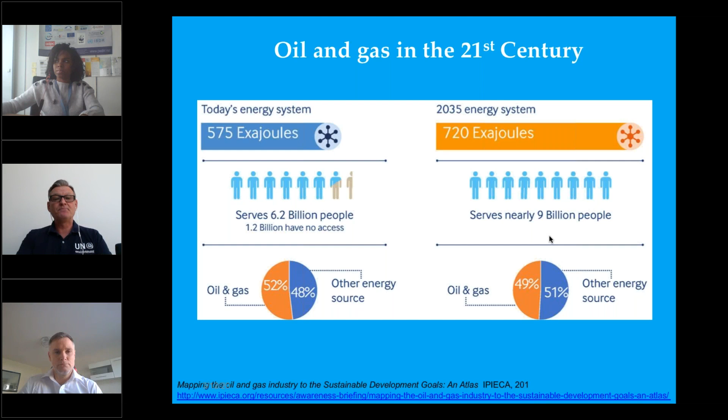Throughout the life expectancy of the oil and gas sector, chemicals are used, let's say, from cradle to grave. We're focusing on the exploration and production side of things, and within this particular module, chemicals are used throughout, whether it's at the time of exploration drilling, logging and testing, well completion, field management, workover and stimulation. Bottom line is, whatever link in the chain of the oil and gas sector, hand in glove with that is the use of a very large and complex number of chemicals.

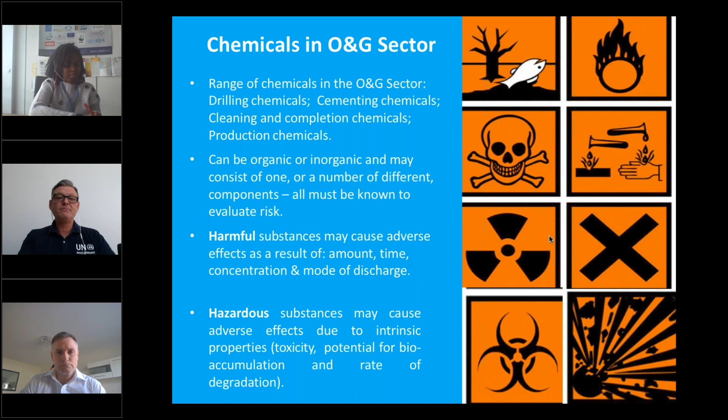Moving on, one of the biggest aspects in oil and gas as it pertains to both chemicals and waste management is the drilling fluids which are used. Drilling fluids are a major component of the sector and present major environmental and public health concerns. There are primarily two categories: the more simple water-based drilling fluids, WBDF, and then the more complicated, potentially more hazardous oil-based drilling fluids, OBDF.

As the name suggests, the water-based fluid's base material is water, and the oil-based fluid's base material is oil. You could think about the difference similar to a water-based or an oil-based paint—the same phenomenon applies to these drilling fluids. In more recent times, a third category has been developed: synthetic-based drilling fluids, where the oil has been largely replaced by more modern synthetic chemicals.

As I mentioned, water-based drilling fluids are by far the simplest, the most environmentally benign, and also the cheapest. So given the choice, oil engineers would, as a first port of call, use water-based drilling fluids simply because they're cheaper. However, they have limitations—they're not good for use in deep, complex drill sites which are horizontal, or where we have particularly complicated geology. That's where oil-based, or more latterly synthetic, drilling fluids come into play.

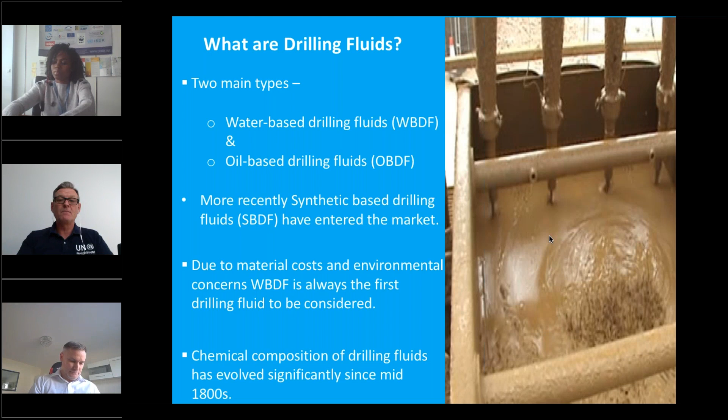Each of those chemicals comes with their own environmental and public health risks, and we as environmental practitioners need to be familiar with the components and familiar with how best to manage them. Bottom line is, drilling chemicals, drilling fluids are a cocktail of different chemicals.

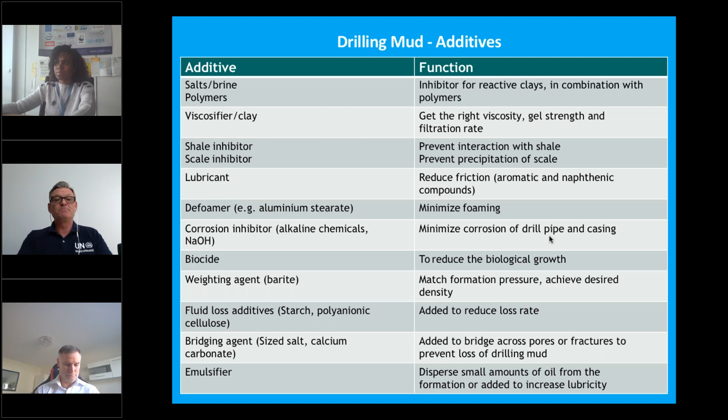It's not a hazardous, toxic impact—it's more harmful in that it's a physical covering of the seabed, but in a relatively short period of time, that seabed is going to recover. That said, we don't encourage the discharge of water-based drilling fluids in a terrestrial, shore-based environment, because they can have elevated pH and elevated salinity, which aren't necessarily an issue in the marine environment, but in the terrestrial environment they'll probably need to be contained and treated before disposal.

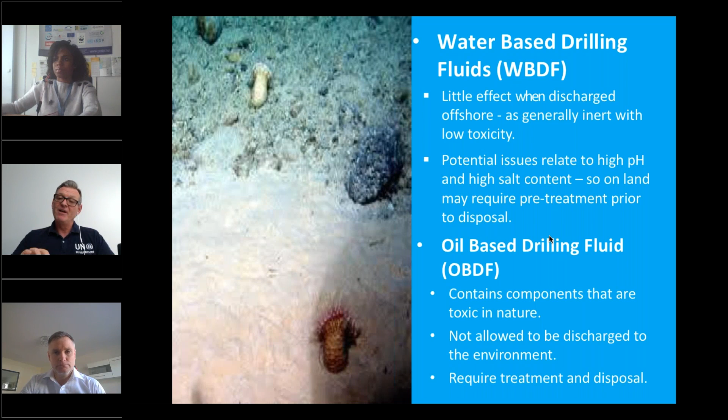Dealing with the more complicated, deeper wells and more complex geologies, we use oil-based muds. These muds are a cocktail of chemicals, many of which are toxic or hazardous. They are not allowed to be discharged within the marine environment, nor the terrestrial environment. They need to be contained, managed, treated, and finally disposed of. Due to economics, all drilling fluids will be reused and recycled to the extent possible, but there comes a point after which they have to be disposed of. That's where some of our greatest challenges are encountered.

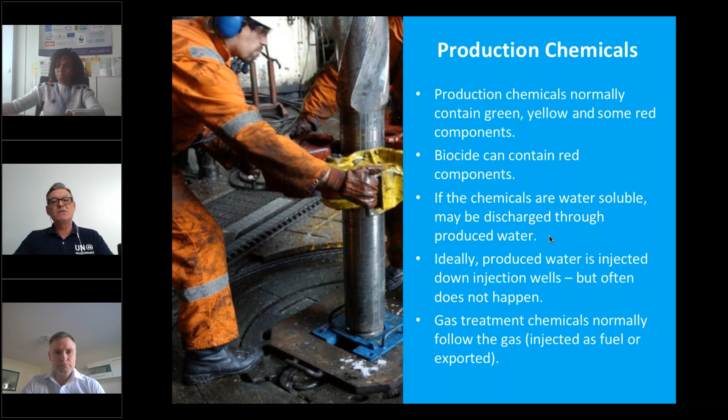As mentioned previously, we have a host of chemicals used as production chemicals. As you can see in the slide, some of the chemicals are what we call green, yellow, or sometimes red. That's a form of simple categorization which denotes the level of hazard. Simplistically, green listed chemicals are relatively benign, yellow is medium, and red chemicals are of the greatest environmental and public health concern.

We talked earlier about biocides. These are an example of a component which may contain red chemicals - a red flag. We need to be aware, we need to be concerned, and we need to monitor and manage it very carefully.

So the chemicals within the drilling sector will typically be discharged within the host environment. Many of them will be contained within the produced water. What is produced water? When we strike an oil reservoir, it will often be in conjunction with a lot of water. That water also gets liberated through the drilling process, and that's often referred to as produced water. The produced water may contain a lot of chemicals, may contain a lot of hydrocarbons. They need to be managed.

In more sophisticated operations, the produced water can and should be reintroduced back into the underlying geology. Often this isn't done because it's a complicated process, and therein we end up with a disposal, a chemical problem. Again, produced water is a large chemical holding body, a large waste management consideration that we will have to encounter.

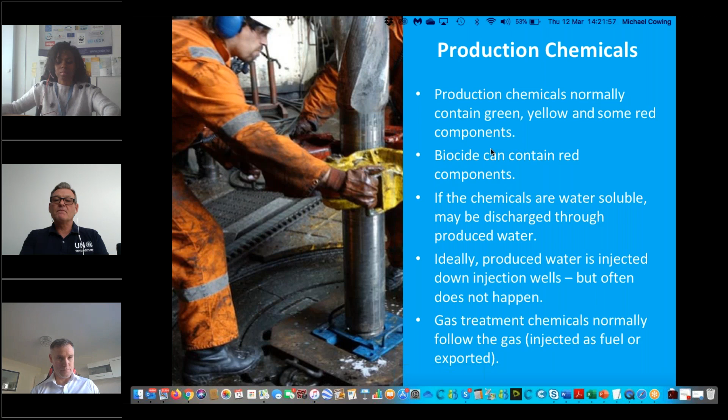You may have heard of it, don't worry if you haven't - in time you'll become familiar with it. Basically, as the name suggests, it's trying to harmonize internationally the language we use, the names we use, the packaging we use when we're handling chemicals, to try and reduce miscommunication. Miscommunication will often lead to accidents and incidents. So we're trying to simplify and harmonize the language we use around managing, transporting, and using chemicals.

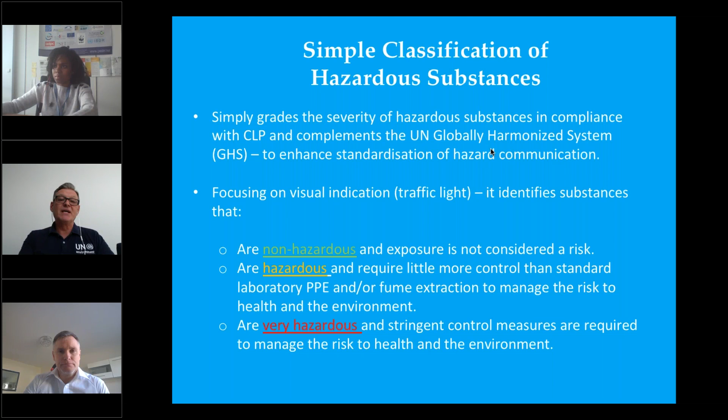I move on now to the Material Safety Data Sheet, the acronym for which is MSDS. Every chemical used, transported, and ultimately disposed of must be accompanied by the MSDS. I would say as an environmental practitioner, this is possibly the most important tool you have in your toolbox for managing chemicals. The MSDS is in compliance with international conventions - it's not optional, it's a must. The manufacturer must send chemicals with the MSDS.

The user, in this case the oil companies and subcontractors, must have the MSDS to hand. It must be available, it must be displayed, so that those individuals working with the chemicals are familiar with the risks they're being exposed to, familiar with things such as the health and safety requirements, and familiar with what personal protective equipment needs to be used. The MSDS will also, in detail, tell us how ultimately these chemicals need to be disposed of.

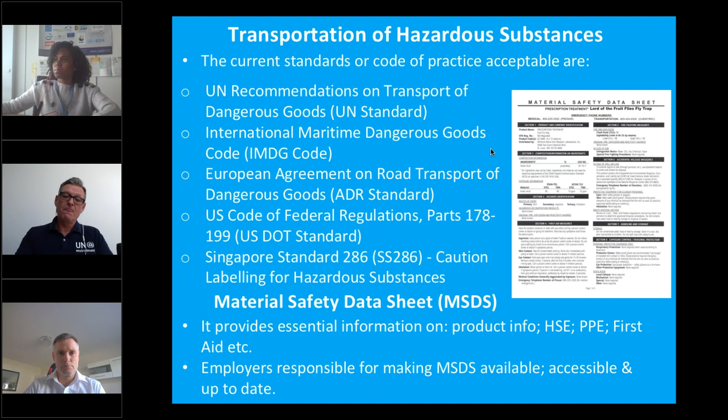To manage the risks, we need to understand the composition of all of these chemicals. We can't know one component and not the other. We have to understand in entirety what the components are and what the risks are. If uncontrolled, chemicals can pose serious risk to both public health and the environment.

To help you in the management of chemicals, there are multiple interlocking, interrelated national and international legislative tools, be them national laws, international treaties, international agreements. There's a host of them in place. We need to be familiar with them and how to apply them.

Most importantly, as I've mentioned, is the MSDS, the Material Safety Data Sheet. This will be drawn up and must be in compliance with all of these international laws and treaties. So as a starting point, the MSDS is your best friend, it's your best tool, it's the thing that's going to help you best manage chemicals in your oil and gas sector.

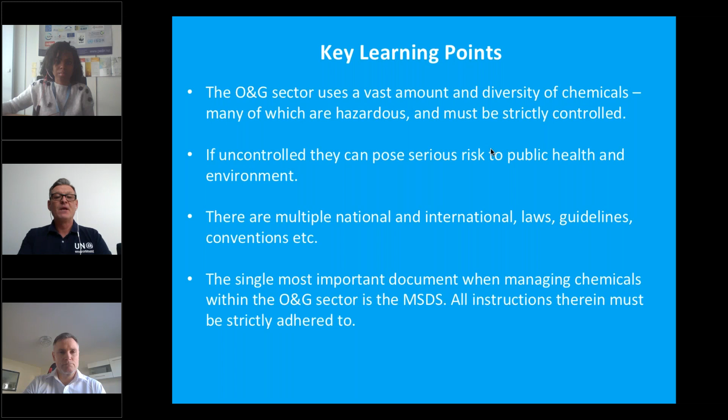The second part of the presentation relates specifically to waste management within the sector, and there's a lot of overlap between use and management of chemicals and management of waste, because many of the chemicals used ultimately end up as a waste product.

What will we talk about in this section? We'll talk about what is waste, why wastes are a concern to us. We'll look at the definition of waste, which is very important in a legal context. When is something a waste, when is it not? We'll look at some of the international frameworks, in particular the European Waste Framework Directive.

In a European context, a very important piece of legislation. What are some of the specific wastes in the oil and gas sector? Waste management planning, which is a key component, and we'll remind ourselves at the end of some of the key learning points.

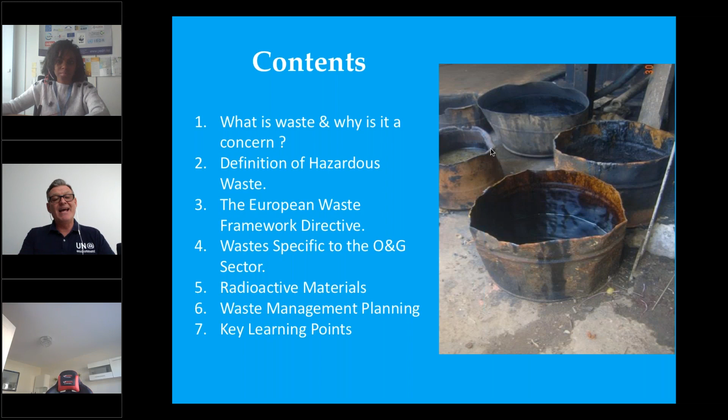So what is a waste? Waste definition: in the legal sense, a material becomes a waste when it is a substance or object which the holder discards, or intends to discard, or is required to discard legally. So it's gone beyond the point of its utility value, it's to be or has been discarded.

When we talk about hazardous waste, that falls under the same definition, but there's a sub-definition: hazardous wastes are those wastes which pose a substantial or serious threat to public health or the environment, hence the name hazardous. They can be hazardous because of their characteristics, which could be ignitability, reactivity, toxicity, or corrosivity. One or more of these characteristics make this waste product hazardous.

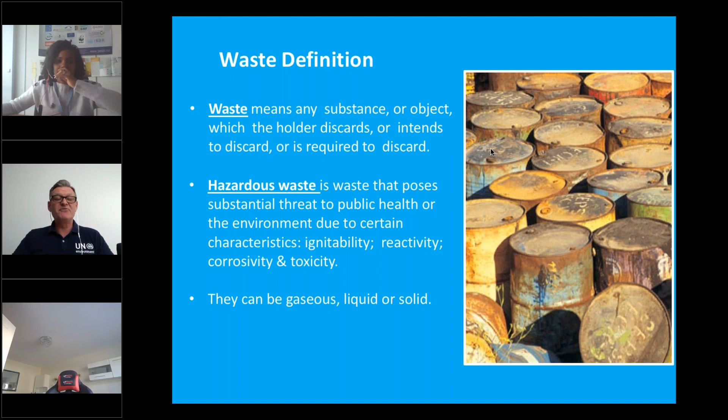And again, they can be in various forms. They can be gaseous, liquid, or indeed solid.

Sorry, Mike, to cut you short. We have like 10 minutes for you to do your presentation. Okay, jolly good. I've just been informed I have 10 minutes left, which is perfectly fine. I think we're on course.

The drilling fluids we've talked about a little bit. It could be oil-based, water-based, or synthetic, but it's the drilling fluid being pumped down the well, which will be reused to the extent possible, but ultimately becomes a major waste management problem for us. We then have produced water, oil and gas being liberated, but often in association with substantial volumes of water.

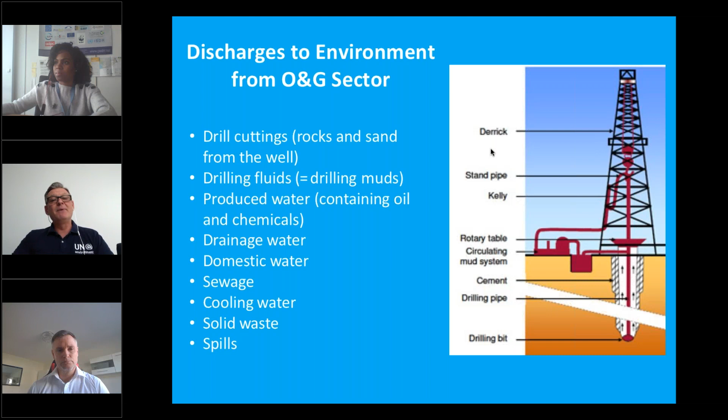In terms of the treatment of hazardous waste, it needs to be managed cradle to grave, that every link of its life cycle has to be managed with no inadvertent discharge to the environment. We have to recognize that the oil and gas sector is a very substantial waste generator globally.

In a lot of countries, international oil companies are working in developing countries. The reality, if we talk about Africa, Asia, to an extent the Caribbean, is that a lot of these developing countries lack substantial or sufficient waste management infrastructure. So they may not have engineered landfill sites, incinerators, or thermal desorption units. If oil companies are producing waste and the host country doesn't have the facilities, they have to be developed, engineered, be it long-term or imported on a mobile basis. Incinerators and thermal desorption units can be imported, or the waste itself has to be managed, packaged, and exported to a disposal facility.

Irrespective of whether the oil company is American or European, if operating in, say, Africa, the oil company does not lower its standards to those that pertain in that particular African country. The important thing is they should adhere to the same standards they're using in Europe and North America. In my experience, very often they will try not to, but as regulators, as environmental scientists, we have to ensure the oil companies are operating to the highest standard.

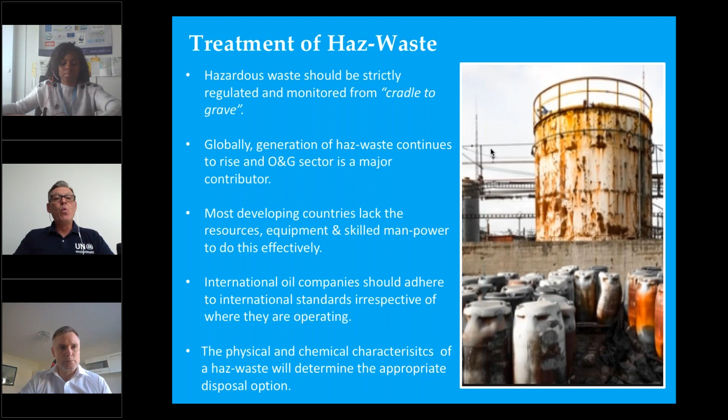The physical and chemical characteristics of the hazardous waste will determine which disposal option we use. In Europe, a very important piece of legislation is the European Waste Framework Directive, which sets in legislation many important components and considerations.

It enshrines the polluter pays principle, which means if you generate the waste, if you are the polluter, you have to pay. Extended producer responsibility means if you're the waste generator and you give it to a third-party transporter, for example, and he dumps the waste illegally, you as the generator still retain a responsibility. It's not out of sight, out of mind.

It also introduces the waste hierarchy, which I think we'll all be familiar with. This enshrines the fact that at the top of the hierarchy, the most desirable is that we prevent waste, minimize waste, reduce waste, recycle waste, and only at the bottom end, only the smallest remaining fragment of waste ultimately needs to be disposed of.

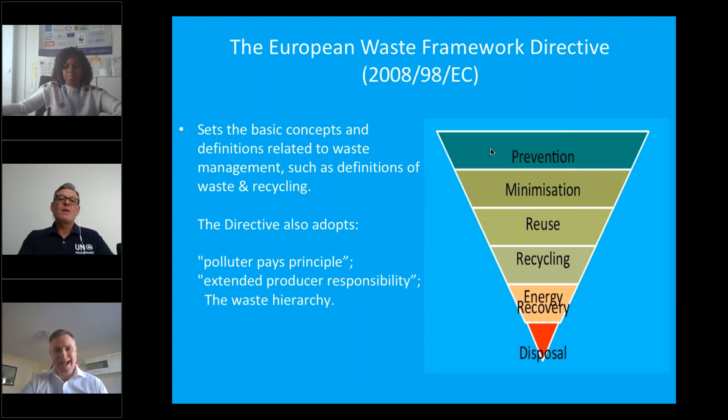In terms of the management of hazardous waste, when you have hazardous waste, you have to act appropriately. The hazardous waste cannot be mixed with inert waste. It cannot be diluted. It has to be properly contained and labeled, must go to a licensed hazardous waste disposal facility, and the environmental regulator, whichever country, has to be notified of that movement of hazardous waste.

So some rogue operators might want to dilute the hazardous waste, or mix it to get it to a chemical characteristic where it's no longer hazardous. Such approaches are prohibited in law and should be monitored and regulated by ourselves and not condoned, and corrective action needs to be taken.

The picture on this slide is taken in an African country, cradle to grave. I followed the process. The hazardous waste, which was meant to be going to an engineered landfill, ended up, as shown here, dumped on some agricultural land. Very sad, very common. That's where strict regulation and enforcement is essential.

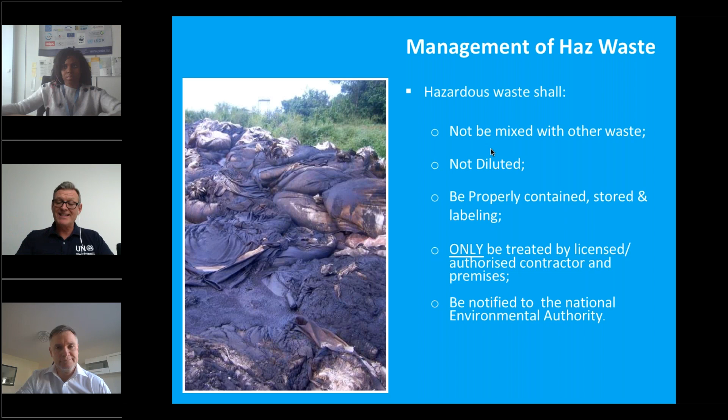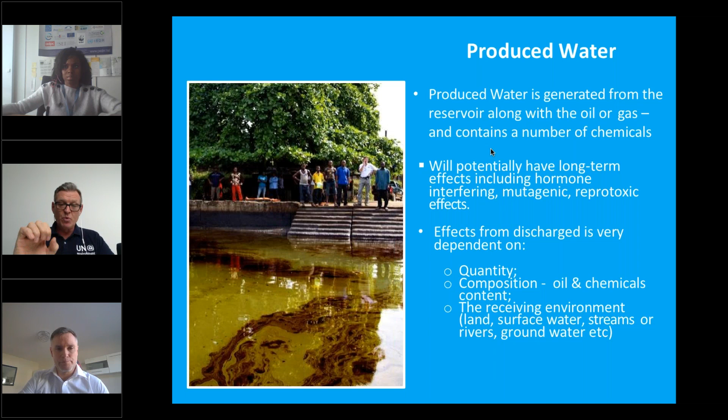We've talked about the impacts of water-based and oil-based drilling fluids. I don't need to labor that again. Produced water, if discharged inappropriately, as shown in this picture, is going to be liberating chemicals and hydrocarbons. Produced water, we have to get on top of it, and I'll explain how we can do that. And then we have very many emissions to air.

One of the biggest culprits of that is flaring and venting. We're saying in this day and age, flaring and venting needs to be a thing of the past. It needs not to be encouraged other than under perhaps emergency situations.

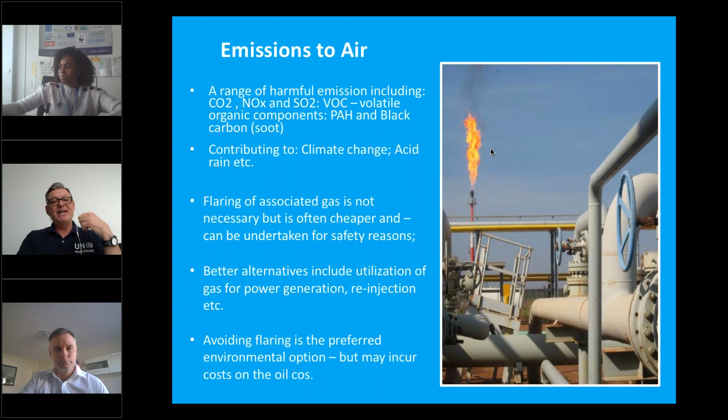How do we manage all of these different solid, liquid, and gaseous wastes? This should be encompassed in the waste management plan. When applying for a license, when the EIA is being done, the oil operator has to produce a waste management plan. With chemicals, we've got the material safety data sheet. With waste, we've got the waste management plan. It is the Bible, it is crucial. The operator must anticipate how much waste is going to be produced, of what characteristic, where and when.

Some of the graphs to the right show what I've extracted from a waste management plan. They're anticipating what they're going to generate, when they're going to generate it, and in what volumes. So the plan must identify the waste, and must also identify how it is going to be disposed of. If there are existing facilities to be used, all well and good. If there's not, what are they going to do? Are they going to build a landfill site, for example? Are they going to import thermal desorption or incineration? Are they going to stockpile, package, export overseas?

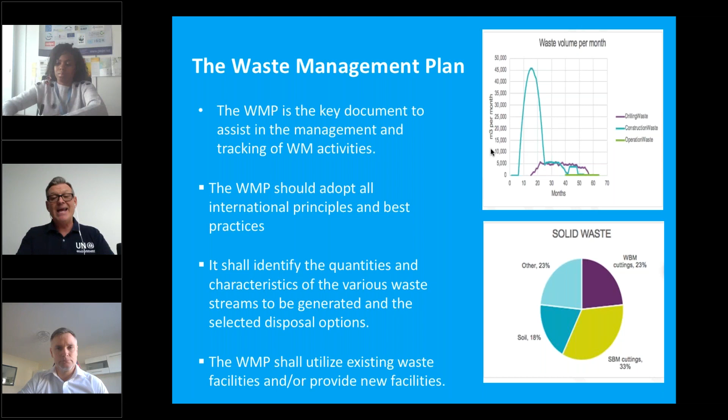When you're evaluating the waste management performance of a company, the waste management plan is your Bible, your go-to document. There are many options for waste management - I've mentioned some of them in passing, and Ian's going to get into detail on them.

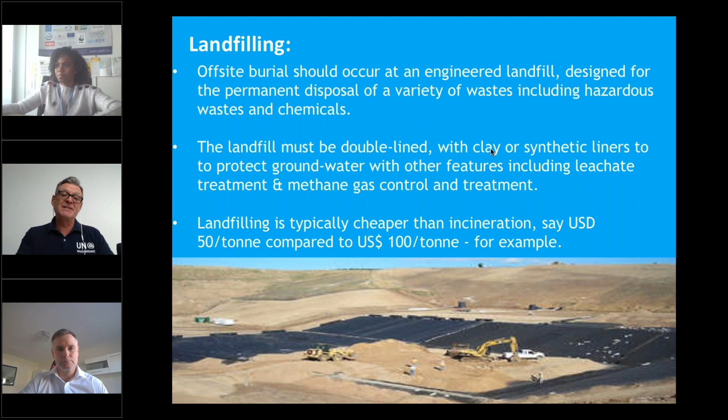We have landfilling, which is an engineered site with low permeability membranes. It's really a containment solution, relatively middle order cost, perhaps $50 per ton. Thermal technologies are more expensive, perhaps double the cost, but there is a role for thermal technology.

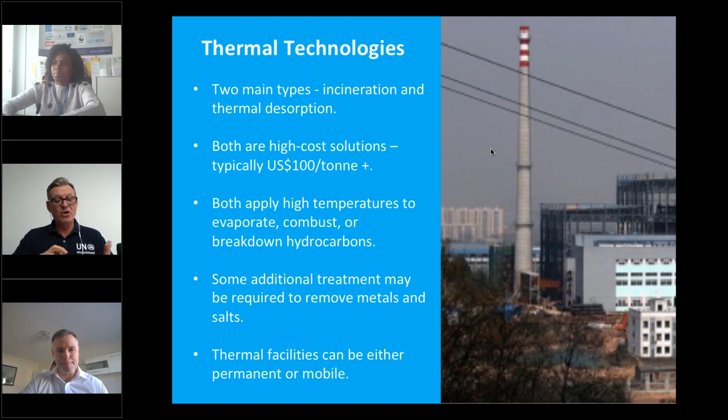Some waste products, some hydrocarbon products won't lend themselves to bioremediation, won't lend themselves to landfilling. They'll need to be disposed of thermally, either by incineration or thermal desorption. Ian will talk more about these in the coming presentation.

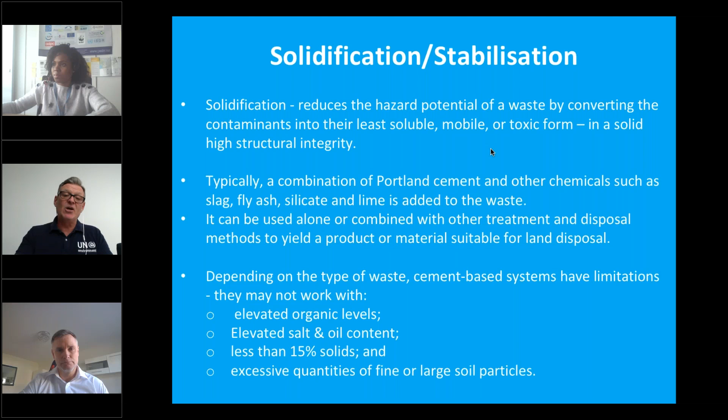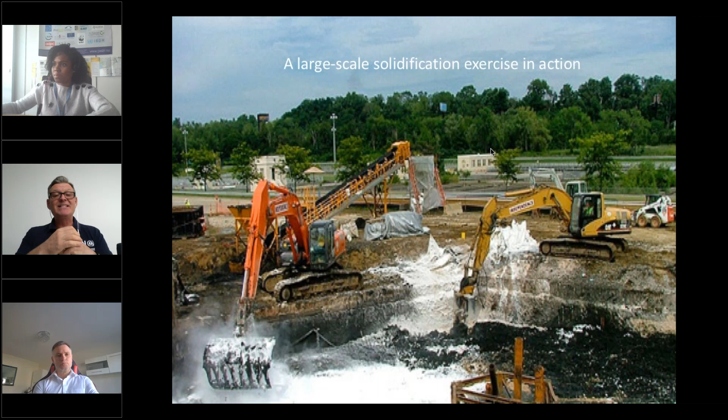There's solidification, where you try and stabilize the product, typically using cement, fly ash, silicate. It does have an application, but doesn't work in all situations. If you have less than 15% solids, if you have very elevated organic levels, it's probably not going to be the technology to use. Here's an example of contaminants, hydrocarbons, being cemented in place to reduce their migration and leaching. So basically, there's a range of waste products and a range of solutions, all of which need to be evaluated, identified, and selected in the waste management plan.

Very quickly then, to summarize with my final slide, some of the key learning points: we have to recognize the oil and gas sector is a major waste generator. Waste management is hand in glove with oil production, gas production. Much of this waste is hazardous and will need strict control, regulation, and enforcement. Some of the biggest waste products you're going to deal with will be the cuttings, the waste mud, and the produced water - very large in volume.

It needs strategic planning in advance, not at the time of when it's being produced. Oil companies must comply with best practice, best international practice. They cannot lower their standards simply because they're working in a developing country. My final point is just to re-stress that the waste management plan is the Bible, it is the key, and it will enable you to keep the oil companies on track, honest, and performing in compliance with best practice. I'll say thank you at that point.

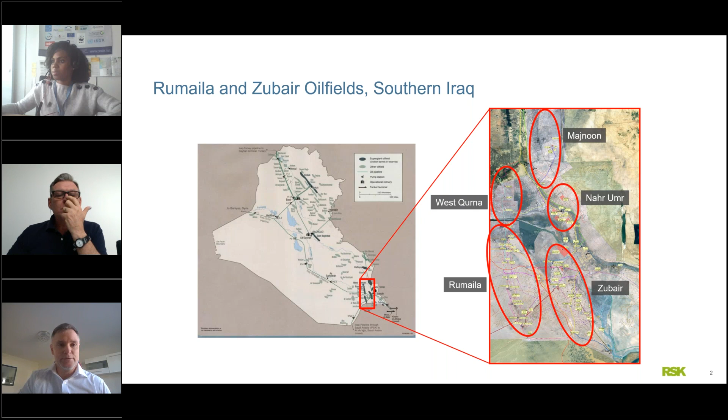Mike's touched upon this in his overview presentation, and what I'd like to talk about today relates to particular primary sources of contamination that we find in the oil fields, including gas vent pits at degassing stations, leaking oil pipelines, and, as Mike mentioned, produced water pits, which come in various shapes and sizes but very often, certainly in southern Iraq, can be very extensive indeed, covering several kilometers laterally, with a mixture of oil and water basically ponding in an uncontrolled fashion across the oil fields.

It's very important to assess the environmental setting of a particular contaminated feature or leak site in order to understand what the potential environmental risks might be, identifying the key receptors to the contamination in order to assess what the potential linkages might be between the sources and the receptors.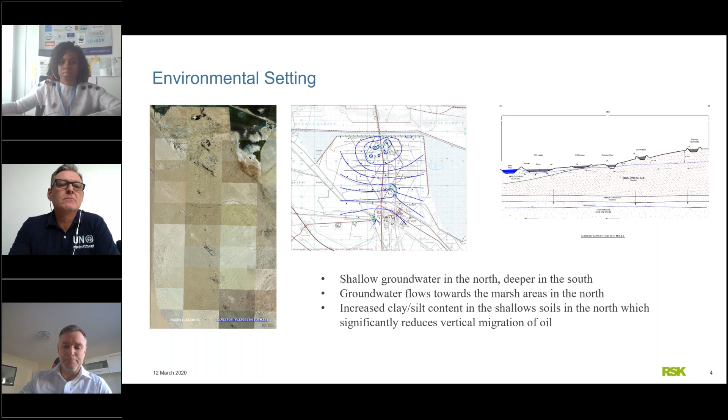On this slide, you can see the point I'm trying to highlight, which is the different penetration of the oil in the north and south of Rumaila field due to the difference in the clay and silt content of the soil.

On the left, we can see a produced water lagoon, unlined, and we've excavated a trial pit into the sandy soils within a meter of the edge of the contaminated feature. You can see quite clearly from the photograph that there is very little evidence of any oil impact in the excavated trial pit. The reason for this is that the permeability of the sand, due to the high clay and silt content, is very low, and this restricts the vertical and any lateral migration of oil through the soil.

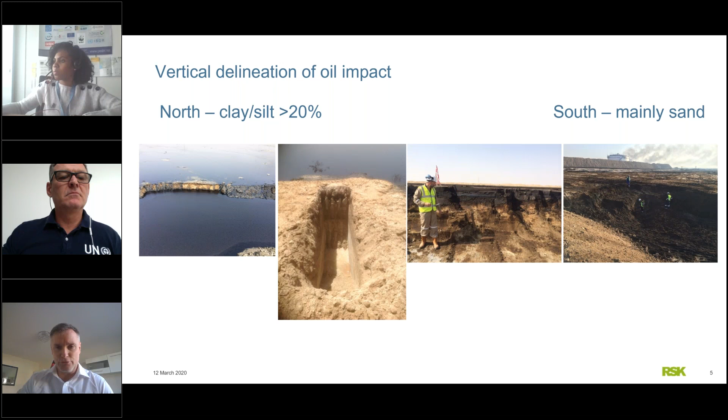In the south, however, where we have a very low clay and silt content, you can see from the pictures that the oil contamination can extend many meters vertically through the soils. In some cases, we've found significant levels of oil contamination even at depths below 10 meters below the base of the pit. This can pose significant challenges when it comes to identifying the right solution for excavating the materials.

It's also very important to have an understanding of the composition of oily wastes in an oil field environment, and to recognize the difference between a fresh oil spill and the degree of weathering. From the table, you can see that in a fresh oil spill we typically have over 60% of aliphatic and aromatic hydrocarbons in the C5 to C35 range, which is the typical TPH fractions of interest when looking at an environmental assessment and remediation program, and a much smaller amount of the heavier, more complex hydrocarbons in the range C35 to C90, commonly known as the SARA fraction: saturates, aromatics, resins, and asphaltenes.

By comparison, when we look at an oily sludge which is heavily weathered and has perhaps been weathering in the desert for a number of years, through the natural processes of degradation and volatilization in the desert environment, we see a significant reduction in the relative proportion of the C5 to C35 hydrocarbons, and a relative increase in the heavier, more complex hydrocarbons that don't typically degrade very well naturally. So you can see that the percentage of C5 to C35 is as low as 15% in a weathered sludge.

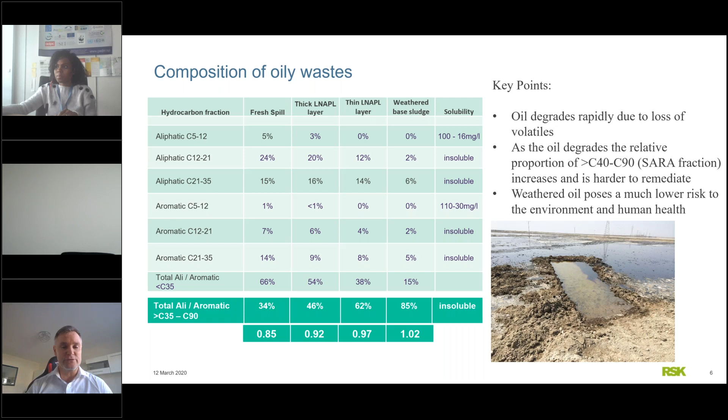Why is this important? Well, as the oil degrades and we get a higher proportion of the more complex hydrocarbons, this material becomes harder to remediate, certainly by biological means. However, the weathering also means that the overall hazard ranking of the sludge, compared to a fresh spill, is much lower. So the sludge poses a much lower risk to the environment and human health because it contains a much lower percentage of the more toxic and mobile, lighter short chain hydrocarbons.

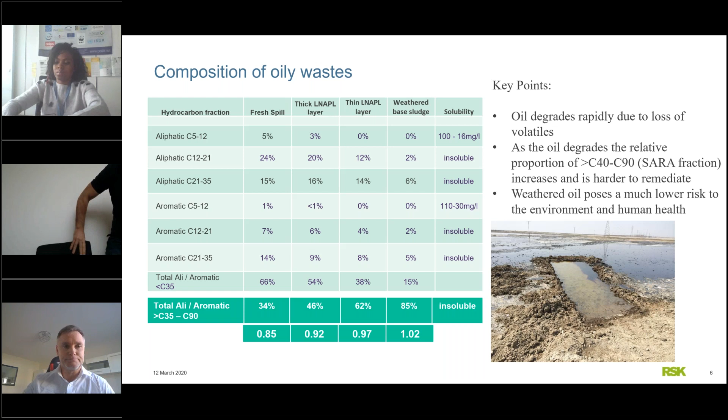When we're looking at the design of a remedial system and an assessment of the risk, it's very important to try and ensure that any remedial targets we develop and negotiate with the regulators are risk-based, taking into account the associated source pathway and receptor linkages identified in our initial assessment.

As I mentioned before, the receptors in an oil field environment are very often groundwater and surface water, but we also need to consider oil field workers and neighbouring communities potentially at risk from contamination sources. In determining risk-based remedial targets, we also need to ideally develop individual targets for the separate TPH fractions rather than generating a total TPH remedial target.

The reason for this is that the risks associated with different TPH fractions vary significantly. You can see on the right, for example, that we have remedial targets for some of the lighter hydrocarbons down in the range of 100, 200, 300 milligrams per kilogram. But as the carbon chain length increases, with longer, more complex hydrocarbons, the remedial targets are much, much higher.

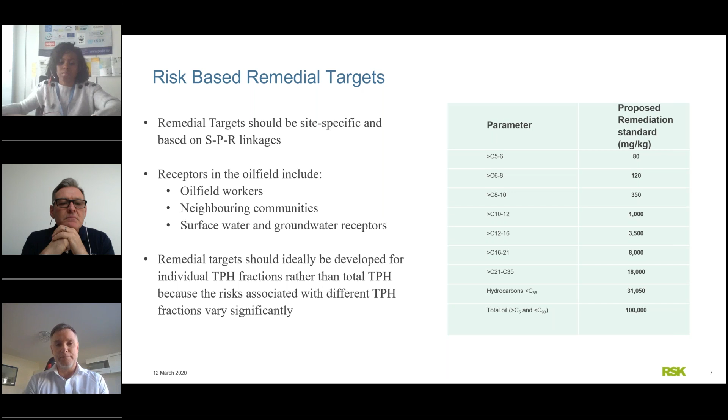So how do we remediate these produced water pits, these vast expanses of oil and water lagoons in the desert? It's very much an engineering approach, using earthworks and heavy plant to isolate the lagoons into separate areas by creating earth bunds, in order to create more manageable areas where we can then pump out any oil and water if possible, or bail out the water into a sump or containment pit.

That's the first phase, which then allows access for us to undertake any UXO clearance that might be needed. UXO clearance isn't necessary everywhere, but it's sadly a very real risk in Iraq, and a very important part of the project before we can start excavating and dealing with the sludges and underlying soils in a remediation setting.

Once we've undertaken the UXO clearance, we then remove the sludge from these isolated phases of the lagoons, typically using mechanical plant to create a levee, essentially pushing the sludge to one part, one side or one corner of the lagoon.

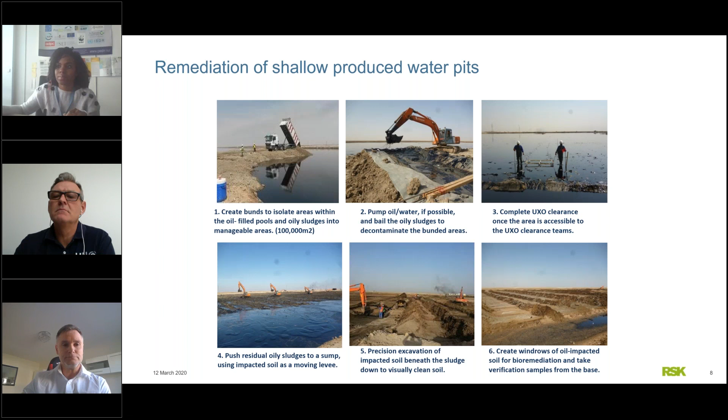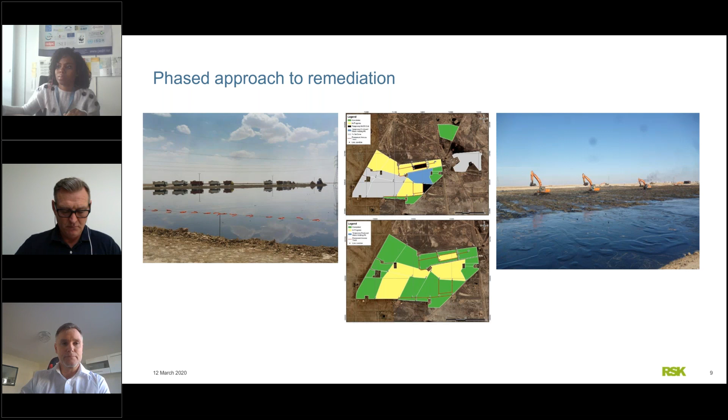We also come across occasionally much deeper features, oil pools. This particular one in Rumaila field was a very famous oil pool known as the Russian pool, essentially a former borrow pit that over the years was used as a repository for oily water and waste oil, building up to huge volumes over time. Actually, potentially a bit easier to deal with than the vast expanses of produced water lagoons.

The underlying sludges were then excavated and segregated for storage, and the contaminated soils were removed in layers for ex situ bioremediation. Overall, a significant quantity has been stockpiled in lined cells for future treatment phases.

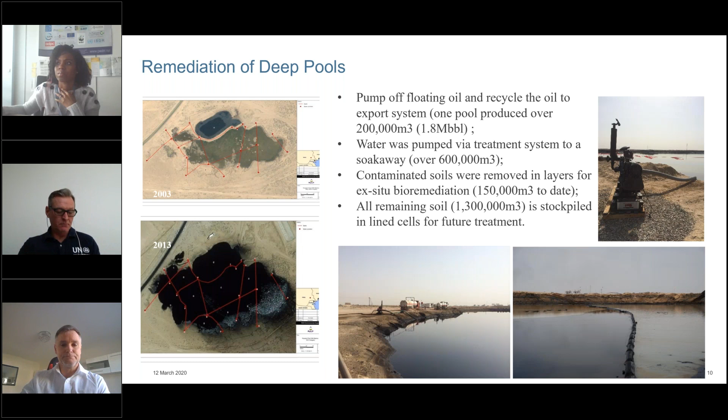So how do we treat the sludges? We've actually looked at two potential options for treating the very heavily contaminated oily sludges. The sludges are quite problematic and can be quite expensive to treat via thermal and other methods. The two options we've looked at both involve the recovery of the oil from the sludge.

Given the huge quantities involved and the high levels of oil content in the sludge, recovering the oil is very important, especially if it's possible to find a reuse for the oil, because the oil essentially has a value, and this can be used to offset the price of the remediation works.

So the first method I'd like to talk about, Mike mentioned it earlier, is thermal desorption by vapor recovery. It's an indirect fired thermal desorption unit with a built-in vapor recovery unit, which actually distills and recovers the oil from the sludge.

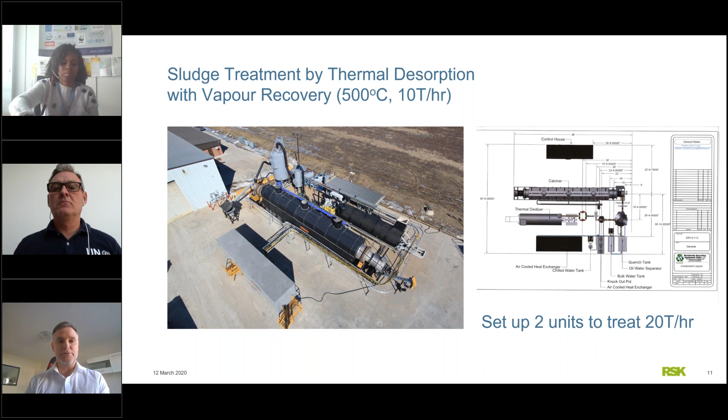In this particular example, the sludge has a solid content of between 35 and 60%. Generally it has a very low water content, and the oil typically comprises mainly long chain hydrocarbons, 85% of which have a carbon chain length above C35.

In the various pilot tests we've done, they've concluded that generally the best recovery yield is about 20%, typically at around 400 degrees C, and we can recover about 10% hydrocarbon compared to the initial volume of sludge. So for example, in this case we had just over 350,000 cubic meters of sludge, and we estimate we can remove just over 35,000 cubic meters of recoverable product with a value of about $50 per barrel. This equates to a huge amount, $11 million.

When you look at the setup and operational costs on this project over a 2.5-year cycle, the overall total treatment cost is $32 million, which equates to $88 a cubic meter. However, if we can incorporate the $11 million of revenue from the recovered oil, this reduces the treatment cost down to $57 per cubic meter.

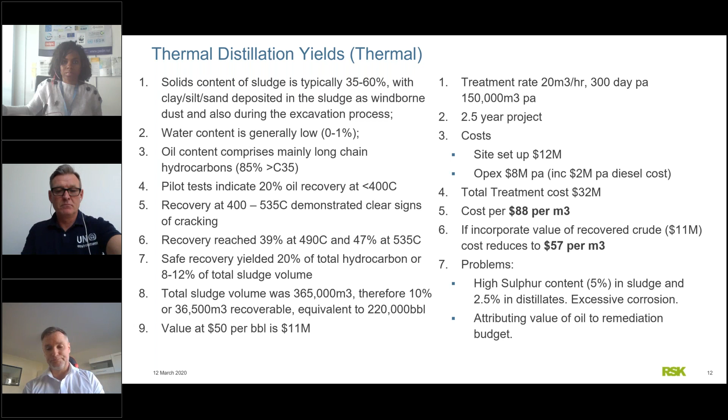No problem. The second option is enhanced separation using a tricanter centrifuge in a heated system using steam and the use of a diluent, typically a lighter hydrocarbon, for example fresh crude oil, diesel, or gas condensate. In this setup, the total cost of treatment over a similar 2.5-year cycle is $17.5 million, giving us a lower treatment cost of about $48 per cubic meter. And if we incorporate the value of the recovered crude, this reduces the cost down to $18 a cubic meter. However, these calculations assume we're using fresh crude as a diluent, provided by the oil operating company, as opposed to using diesel, for example, where there would be a cost for that.

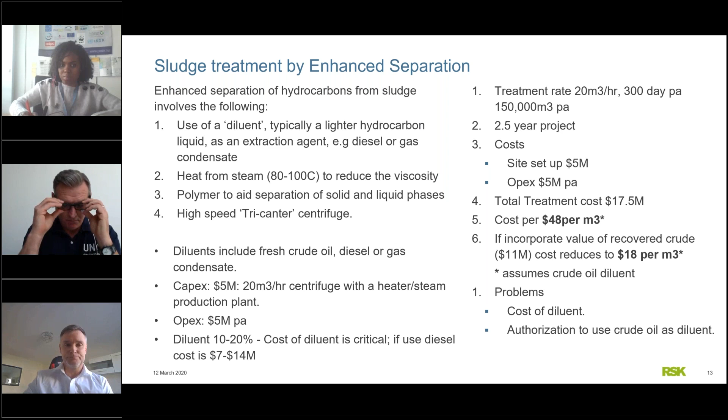Finally, I'd like to talk about how we treat the contaminated soils. So we've removed the sludges, we're looking at options for sludge treatment, which we've just talked about. Once you get below about 10% total hydrocarbon content in the soil, there are much cheaper, more cost-effective options for dealing with the contaminated soil, and we've been doing a lot of work on ex situ bioremediation to treat soils in this category.

Bioremediation applies biological processes to clean up the contaminated soil and water. It's an enzyme catalyzed transformation. It uses bacteria, fungi, and algae, or a combination, and essentially the hydrocarbons are degraded aerobically and ultimately converted into carbon dioxide and water.

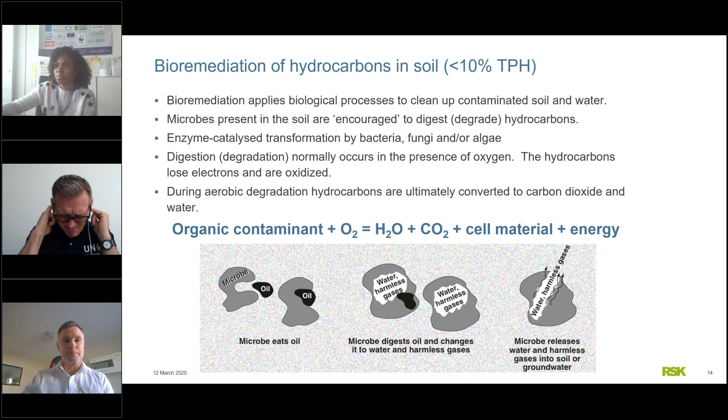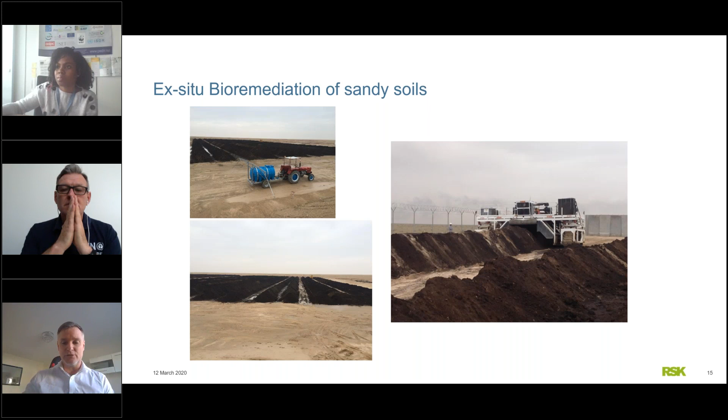Here we can see one of our treatment sites in southern Iraq. You can see that we've laid the contaminated soil out in long linear piles known as windrows, and we manage the windrows using a specialist piece of plant, shown in the photograph on the right, called a windrow turner. This essentially manages the windrows and turns the soil, homogenizes it, and aerates it, which is important in the management of the bioremediation process.

Here's a picture of the typical layout of one of our sites with the windrows, which are all labeled and identified. So when we monitor them and track the progress of the remediation, everything has its own unique identification, so that when we're reporting this, we know exactly where everything is and where the samples have come from.

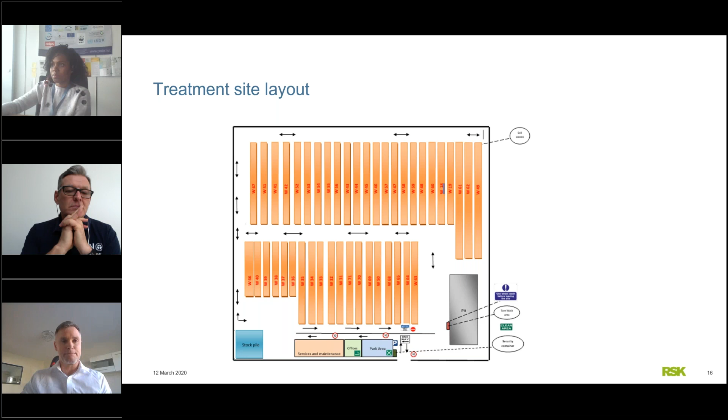The most important thing to do in ex situ bioremediation is essentially to nurture the microbes, creating the best environment and optimum conditions to encourage them to naturally degrade and metabolize the hydrocarbons. It's important that we monitor regularly on a daily basis: temperature, pH, moisture content, oxygen. We also need to add nutrients, most importantly nitrogen and phosphorus, generally by adding normal agricultural fertilizer, or other sources of nutrients including cattle manure.

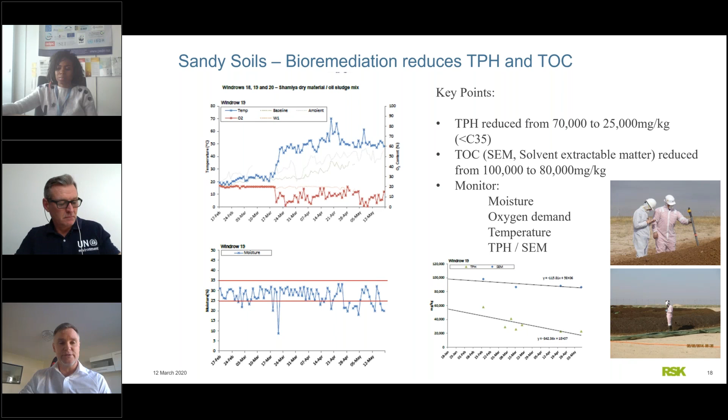Bioremediation has been proven very successful in sandy soils, where we can reduce TPH concentrations from between 70,000 and 100,000 milligrams per kilogram right down to 10, 15, or 20,000 milligrams per kilogram, depending on the remedial target. It becomes more difficult in clay-rich soils, mainly because it's more difficult to homogenize them, and more difficult to aerate them to provide the required amount of oxygen for the microbes to degrade the hydrocarbons.

In some cases with clay-rich soils, we find the TPH levels in the soil actually appear to increase at the start, due to homogenization of the hydrocarbons as the soils become better mixed by the windrow turner. We can add bulking agents and organic matter into the windrows to provide better aeration of the soil, and to do this we often add wood chippings, straw, or sawdust, which is quite effective.

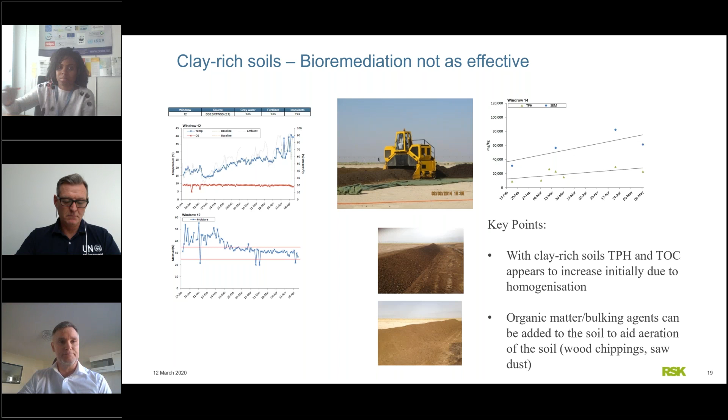The lessons learned in bioremediation, as I said before, is that it's very cost-effective and can be very successful for remediation of sandy soils impacted with weathered crude oil. We can even blend more heavily impacted sludges in a relatively small ratio into the sandy soil to enable treatment of some of the sludge that would otherwise be impossible to treat via bioremediation.

Urea and general agricultural fertilizer normally provide all of the required nutrients. We can use grey water to help speed up the remediation process, but this isn't essential, and more often than not, ordinary RO treated groundwater works very well.

The risk-based remediation goals for the TPH fractions within the C5 to C40 range are generally achieved within about 3 to 4 months via ex situ bioremediation in our experience. The longer chain hydrocarbons above C40, which are present, generally are not degraded very well. This can cause some visual impact even in the treated soils, but typically they have low toxicity and low solubility, so it's more of an aesthetics issue than a risk. Planting can normally overcome any concerns over visual appearance if this is considered an issue.

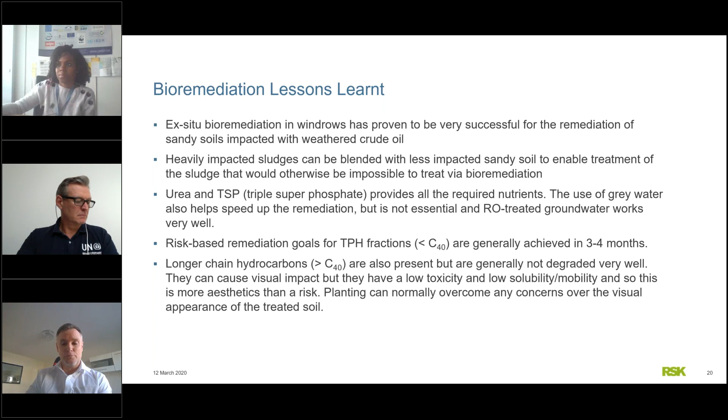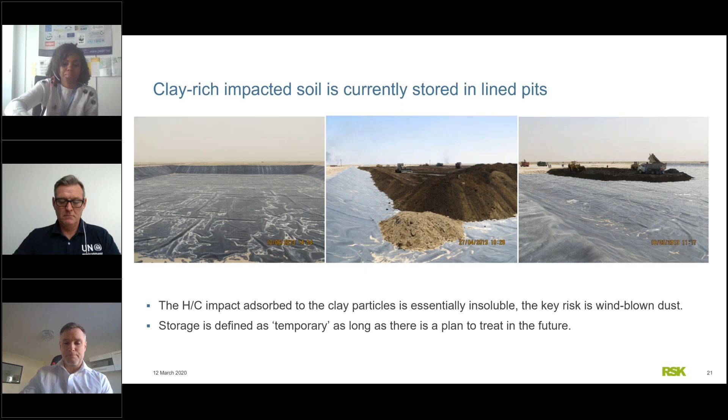So to conclude, remediation and waste management costs can often be offset by the value of the recovered oil, especially if the oils are contained quickly to reduce volatile losses. Early intervention really captures the most value from the recovered materials. It's very important that the field program is controlled to minimise mixing of wastes and preserve the quality of the oils and sludges to maximise oil recovery. Where possible, we should try to use the recovery of oil to offset remediation costs.

This can actually make treatment costs much more viable to the oil operating companies, even when employing thermal methods, which typically are considered quite expensive. We've also shown that ex situ bioremediation is an effective treatment technology for marginally contaminated soils where oil recovery is not cost effective.